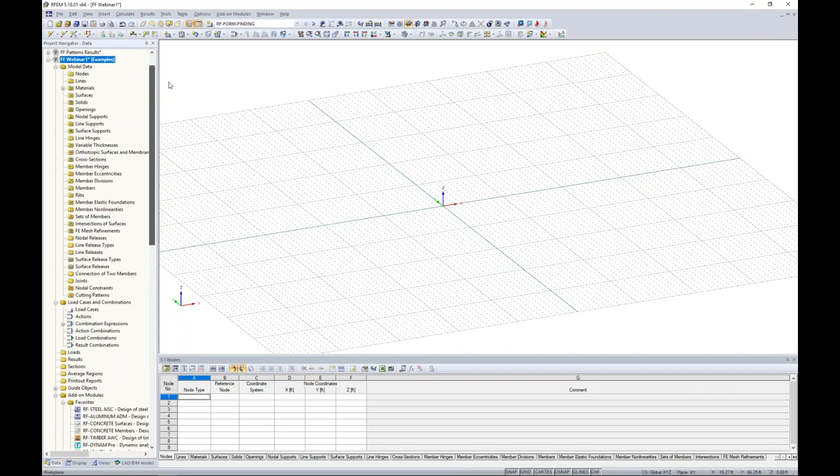But with RF-STEEL AISC, which we'll touch on later, that's an add-on module you can launch from here. Our results will also be available within the project navigator. The fourth tab down here may be new to some of us - by enabling that CAD BIM model option, we now have this fourth tab to import an IFC or a step file. So I can simply click one of these buttons and I have available to me my IFC building for my office building.

So with a few steps, we can see here that the IFC file is imported into our main program, RFEM. Now, I want to be clear that these are still just components - they're not actual elements within RFEM, meaning they're not surfaces, members, or solids. We would need to convert those to elements in RFEM, so right now this is just serving architectural purposes.

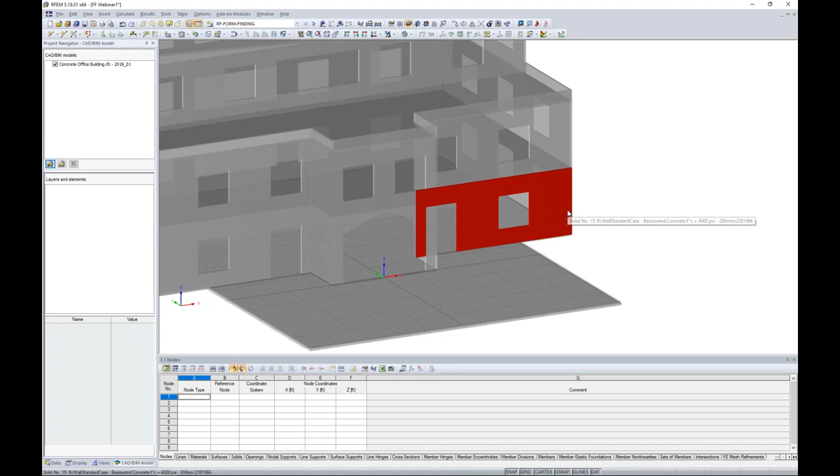In particular today, for this concrete office building, I'm trying to design a canopy on the front face of this building, but I want to make sure it lines up perfectly with the front face of this office building. That's the whole purpose of importing in this IFC file - we're not going to be designing the building today.

So what I can do is take one of these elements, and in particular, we'll start with our front slab. I can right-click to create a surface. Now the program generates some arbitrary thickness and selects some material within the model - this really doesn't matter, we're actually going to end up deleting this slab. We're purely using the nodes and lines for geometric purposes to generate our canopy structure. So I can just click OK.

Once I've done this, I can actually hide my IFC file, and all I'm left with is this shell element that I converted from that file into RFEM. So what we'll do here is turn this into wireframe view with my view options up at the top, and I'll take this line element on the left side of my slab.

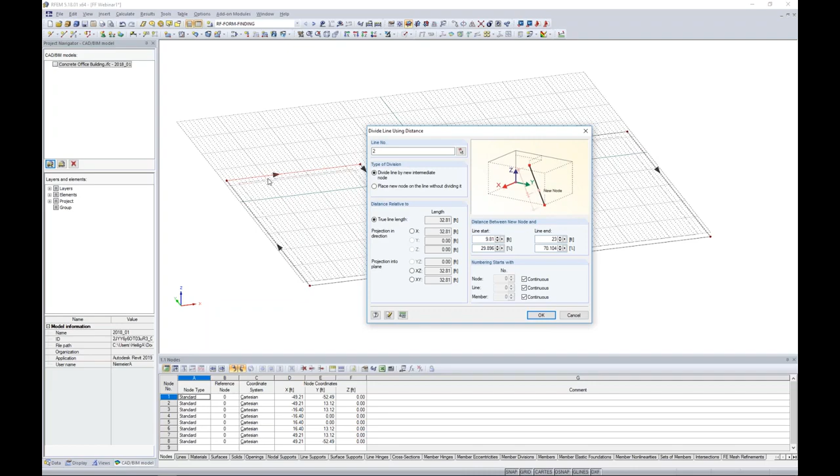I'll right click to divide the line by a certain distance. Here is where I can select 23 feet from the line end, and I can see with my black arrow here what's the line start and what's the line end. I click OK - so all I've done is generated an additional node here right along this line length.

Now I can hold down my control key to select that new node in addition to this node here. I continue to hold down my control key and take advantage of what's called drag and drop. This allows me to make quick copies within the model without using that move copy tool.

I want to additionally use this connect lines or members tool up here at the top. So I select this, and what this allows me to do is highlight over that node, and it simply broke that line apart in two. So I take these newly generated nodes, holding down my control key to select them, and now I'm going to use my move copy tool.

I'm going to create one copy in the global Y direction, which I can see my global coordinates here of negative 30 feet, and I click OK. So here are these new nodes generated at a distance of 30 feet in the global Y direction.

Now I need to add in a node right here at my origin, so there are several different ways to do that. Up here in our quick tools, we have the option to draw a new node, which I could just easily snap to the drawing grid here at the origin. We also have this feature called node between 2 points - when I select this option, I can click on the node on the left, the node on the right, and the program automatically suggests that I'd like to place a node right at the midpoint.

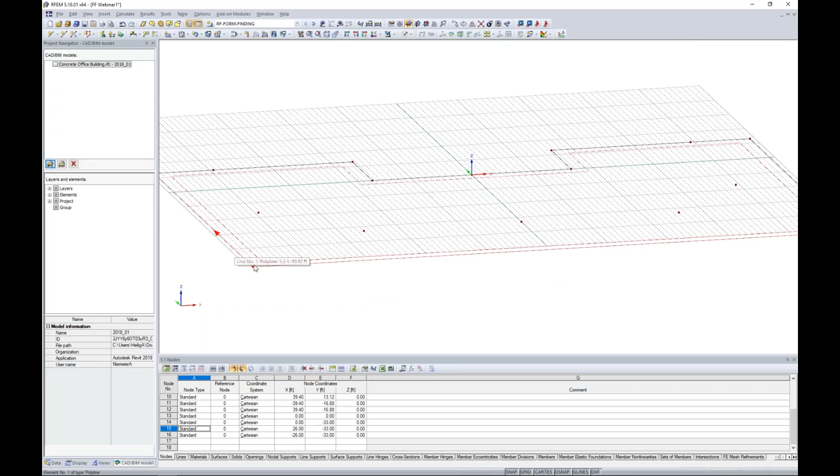Now that we're done with the basic nodes at the bottom of our canopy structure, I'm actually done with this surface, so I can select it and hit delete on my keyboard. We can clean up the model by deleting all the line elements we no longer need, just clicking on them and hitting delete, and we're left with only our nodes at the bottom here.

The next thing to do is generate our columns. These won't be columns yet, just lines, placeholders which we'll later assign a cross-section and material to. I want to select the nodes I'm first interested in, holding down my control key to select various nodes, then use my Move Copy tool.

We create one copy in the global Z direction, the vertical direction, of 23 feet. Before I hit OK, I go into the Edit Expanded Settings, which allows me to create lines between my copied nodes, saving an extra step rather than drawing those lines manually. Once I click OK, those line elements that will eventually be our columns are drawn here.

Now, in the rear of my canopy, this is where it will be framing directly into the office front face, so I don't need to draw columns back here. Instead, we're going to attach at the top of the canopy directly to the office building. So I can highlight these line elements and my bottom node and delete them all together, leaving just these nodes up top.

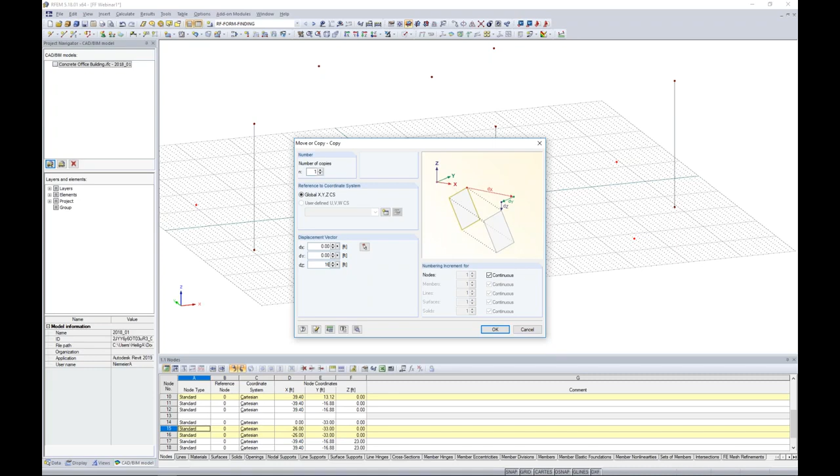Now, in a similar fashion, I want to select the individual nodes left down here at the bottom, use my Move Copy tool once again, this time only a distance of 16 feet. We leave this setting to create lines between nodes, click OK, and here are my additional columns.

Again, back here we're framing directly into the office building, so I don't need these columns, just these nodal points at the top. And just like that, we've finished with the basic geometry from that initial slab. I'll turn off my grid down here at the bottom, and I'm only left with these node points, and I'd like to draw the outer profile of my canopy structure.

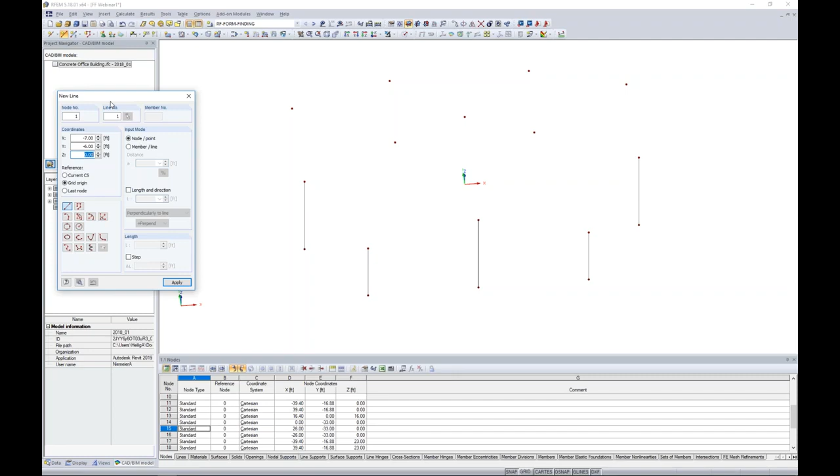I can choose a new line element here in our quick tools, keeping in mind I still have drawn no members within the program, just simple lines and nodes. This is exactly what you'd think of as AutoCAD, just line elements only, and we choose this straight line option.

Here I can snap to these different nodes I've generated, and the program is fairly good about using the O-snap settings to snap to the top of these nodes. I continue around drawing the structure, then right-click to exit, and we have the outer profile shown.

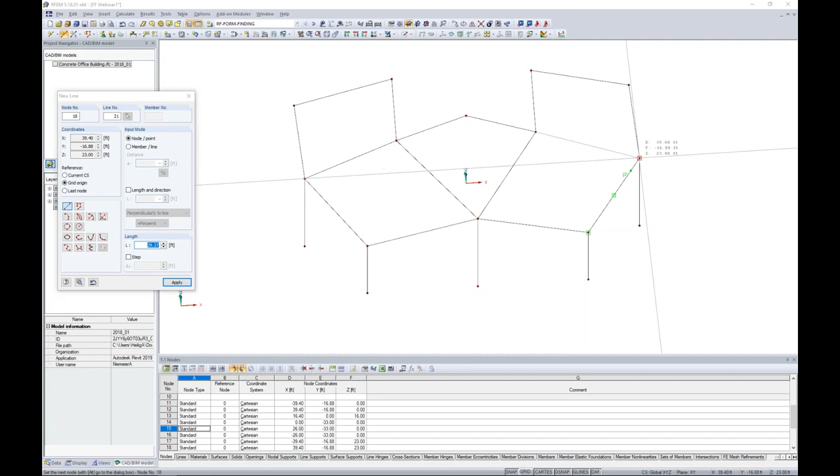Now I need to draw lines to define the individual cells of my canopy, so I continue by snapping from one node point to another, doing so on the right side of the structure. And just like that, we are finished.

If we're interested to see how these elements frame into my office building, I can always reactivate this IFC file of my office building. Remember, these are just components used for architectural purposes, so I want to make sure my canopy isn't framing over any windows or doors. So far, it looks okay, so we turn that IFC file back off.

Now we want to begin drawing our cable elements. Our cable elements are going to be placed on the boundary lines of my fabric membrane.

This is pretty common within membrane construction. These tensile cables will take the tension forces as the fabric is stressed.

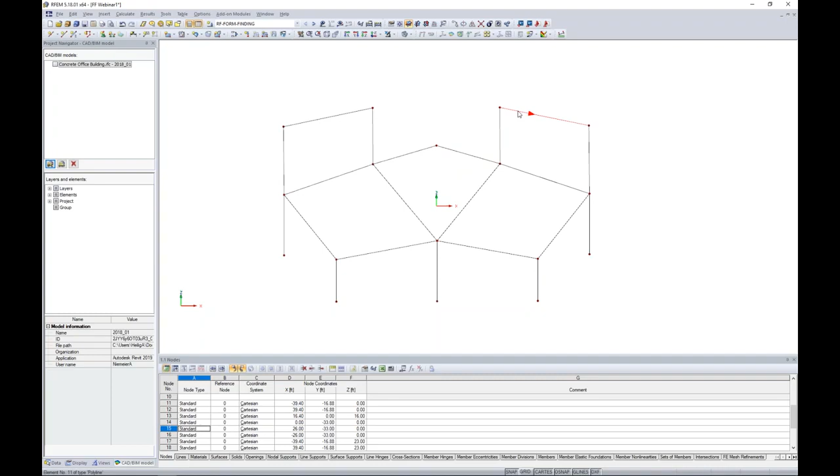At locations where we're framing directly into the office building, these line elements will be cable elements, so we can just assign cross-section properties for the cable elements to these lines directly. But for the other line elements at the front of the structure, we have a small issue.

These will eventually be HSS steel members, but I also want to show cable elements at this exact same location. The problem is that both the steel member and the cable elements cannot share the same line, so I actually need to draw a small offset line here to represent my cable as an arc member.

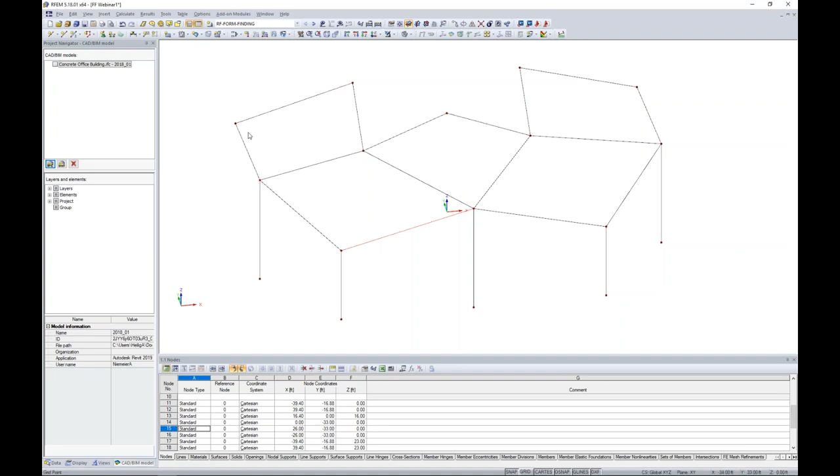How I can do this is to turn back on my grid down at the bottom, and we don't want to use these global X, Y, and Z coordinates because we have some pretty odd geometries here. We have a nice feature in the program where we can define our own work plane by clicking on 3 grid points.

So how I can do this is to click this option once. I click 3 times to define my grid, and then you'll notice that my drawing grid is automatically placed at the incline that I've specified with those 3 points. So it has a new coordinate axes of U, V, and W.

With this new coordinate system, I'm going to draw a new line again, but this time I'm going to draw an arc via 3 nodes. So I can simply click on the point closest to what will be my office building, and click on the column point, and there we have it. We just have a simple arc element.

Now keep in mind, the arc radius is completely arbitrary. It doesn't matter what we set this to. The program will later override this shape with the form-finding process based on the pre-stresses that we put in, to find the correct catenary shape for us.

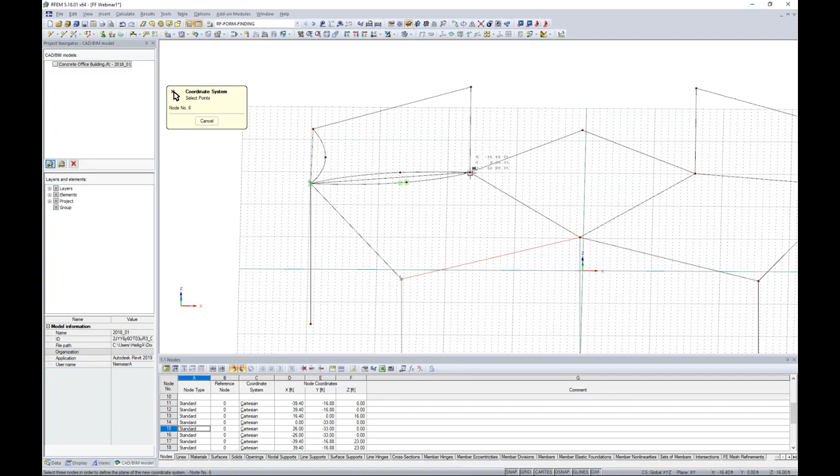I'm going to do the same thing at a different location for my cell points, again completely arbitrary. We need to move up to the second cell and change our user-defined drawing grid. So I click first to reset the drawing grid, click it again to define my new point, and click on 3 points here. Now you'll notice I have a new drawing grid at a specified angle.

So we go to draw a new line here with the given arc, and I can simply snap to these points, again any arbitrary points. We need to lastly do so over here, so we click this option in our toolbar for a user-defined grid, click our 3 new points, and now we have the specified angle given.

We go back to draw a new line element as an arc with 3 points, and continue on with this process for our additional cable elements, and one more time for our third cell.

Deactivating this grid at the bottom, I have these cable elements shown here, and I'd like to show them on the other side. Rather than going through that entire process again with our user-defined grid, we can hold down our control key to select what will be these cable element lines and take advantage of our mirroring tool.

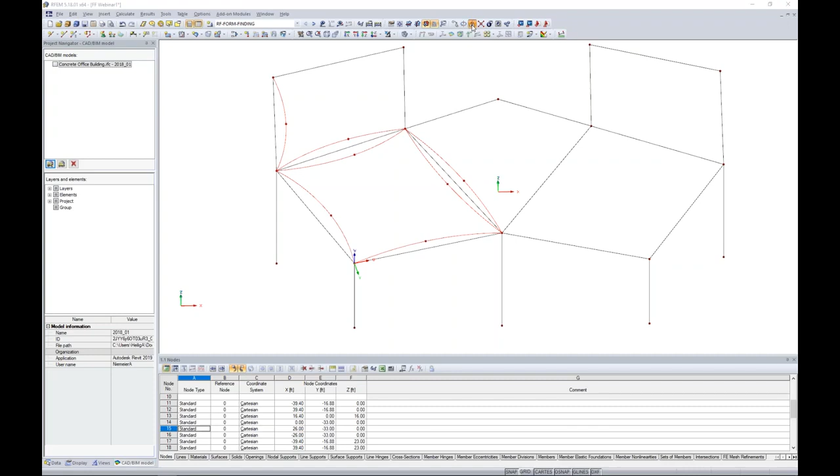Mirroring tool, exactly like what it sounds like, similar to what you'd see in AutoCAD. We can create a copy by mirroring about the global YZ plane, and I can click any point within the model to mirror about. I click OK, and here we are presented with our what will be cable elements on the other side of the structure. That just saves us an immense amount of time.

So now that we've defined the boundary lines of what will be our fabric membranes, we can move on to drawing those 2D surfaces within the program.

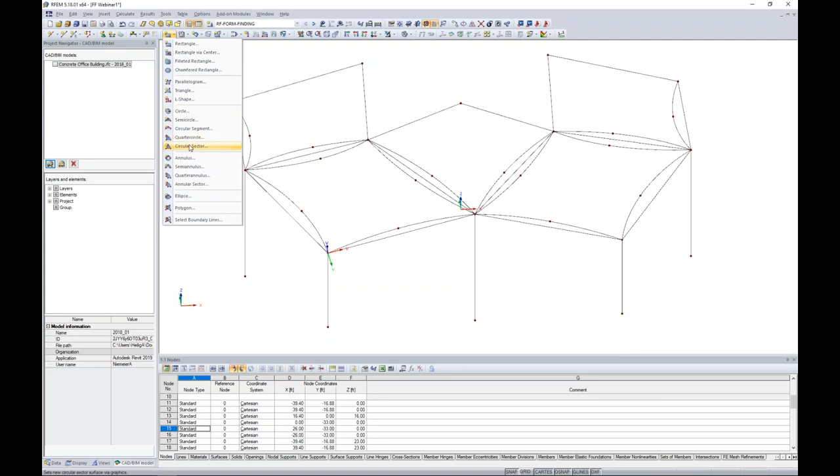For this, I would typically suggest for a flat membrane to draw a new surface element. But you'll see here that all of these surface elements within RFEM are only considered in a single plane. If we take a look at this very complex geometry, I think we can make the assumption that these surfaces are certainly not in one plane.

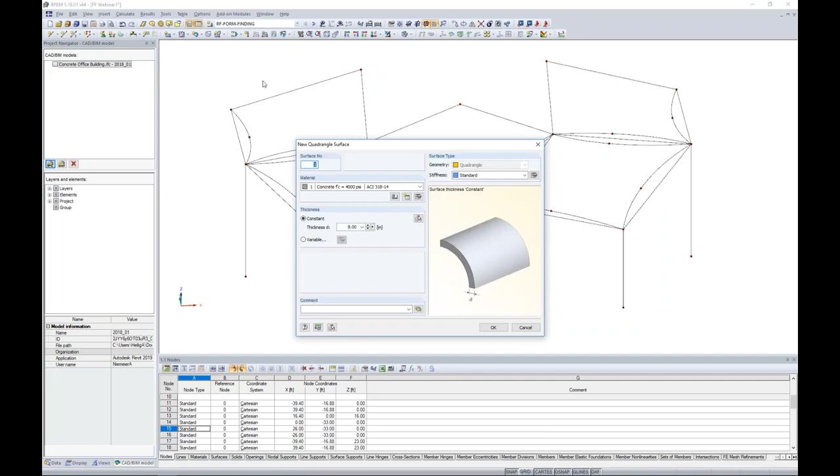So this is where we need to use the option for a quadrangle instead. We can use that from our drop-down list here, quadrangle, general 4-sided surface. The stiffness will be set to membrane orthotropic.

And the next thing we want to do is to define here what will be our membrane material. So in all cases for these membranes, you're likely going to have to create a new material. So we can do so by creating a new material, which our dialog box pops up. We can give it a name. We'll call this one membrane.

We even can change the color. So perhaps for my model here, I go into my color palette and I'd like to use a green color instead of blue for my fabric membranes. We change the material model here to orthotropic elastic 2D. Now, I want to preface this that with this information here, this is likely you're going to get from the manufacturer. Maybe you have your own testing methods or whatever relevant resources you have.

For our example today, we know from our manufacturer that our fabric membrane is stronger in one direction than it is the other. But this is actually something that I'm going to set in as an isotropic membrane for the time being. The reason why is because I don't know with these complex shapes of my membranes, complex geometry of the canopy, which way I should span that strong axis of my membrane to take the high tension forces. So I'll show you later on how we can easily determine that.

So for right now, we want to set this to an isotropic material, which means it has the same stiffness or the modulus of elasticity in both the X and Y direction. But keep in mind, we'll come back in later on to adjust this. Now, as far as the shear modulus in the first two directions, we have relatively no shear strength, but in the plane of the membrane, in the XY direction, we want to set this to 7.25 KSI. Poisson's ratio, we can set this as 0.3, and I click OK.

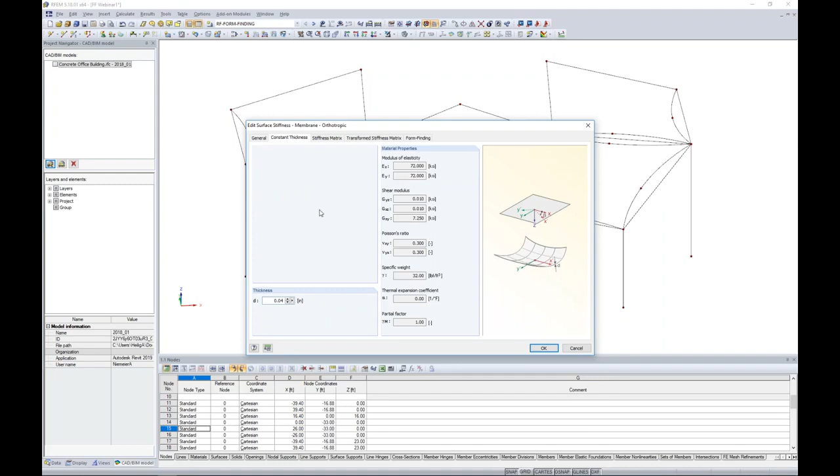What's quite powerful is that we can view the stiffness matrix of our membrane. So if you're interested based on the material properties that we put in here, this is exactly the stiffness matrix that will be reflected in the RFEM model. And finally, our form finding tab. This is available because we have activated the form finding module at the beginning of the presentation.

We have two different calculation methods for this, either standard or projection. So standard is pretty typical for fairly flat membranes, and we'll be using that for today. Projection would be used for more conical type structures. So with the standard calculation method, we can specify a pre-stress force in both the warp and weft directions. This is in the X and Y directions, and we'll choose 0.5 kips per feet. And I click OK. So now we're done defining all of the various settings for our membrane.

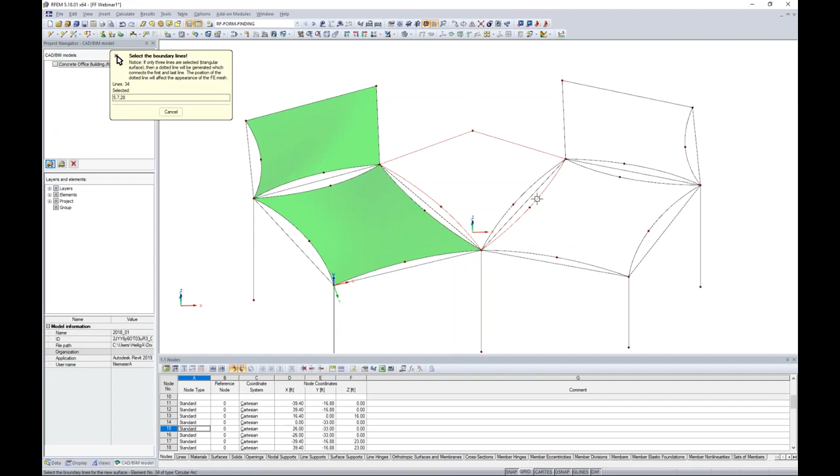We click OK. The program's asking me to go ahead and define the boundary elements of my fabric membrane. So you can see that as I begin to click what will eventually be these cable members, that our fabric membrane is created. And lastly, our last cell over on the right, we right-click to exit out of that dialog box. Again, if we're curious to see how this frames into our concrete building, we can activate that IFC file, and we can see that everything looks to be great so far.

So deactivating that, we want to move on to the cable elements. So again, right now, all of these cable elements are just lines. They don't have a cross-section or material defined. So what we can do is to hold down our control key, select all of our membranes, and I'm going to choose a visibility by selected objects. When I do this, I can highlight all elements within my model.

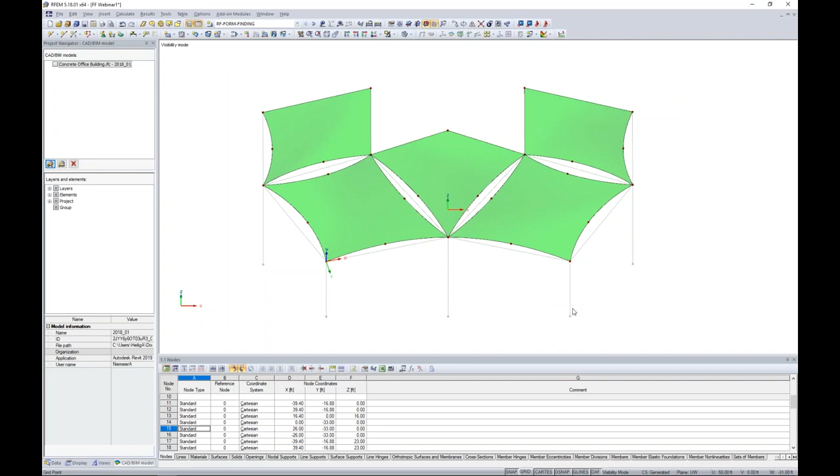Now you'll notice that down here, my column lines and the other various lines are not available to select. That's because I've deactivated them in my view. I only can select my membranes and their boundary lines. So I can right-click to edit the lines. And we're brought into our line dialog box. And the third tab here is called Member. This is where we can make a member available by selecting this checkbox. And here is where we can set the member type to cable.

The program's telling me I need to create a new cross-section, so I'll access my cross-section database, which you can see here we have all of our various cross-sections available within RFEM. We have several parametric sections, massive sections, thin-walled sections. We have all the rolled sections from the various standards, and in particular today, I'm going to use this solid

sections. So this just has some pre-populated diameters. They're basically just round bars populated from the AISC with set diameters, but you can always create your own with a parametric section. We'll choose a 1/2 inch diameter cable. The material is also set within this same dialog box.

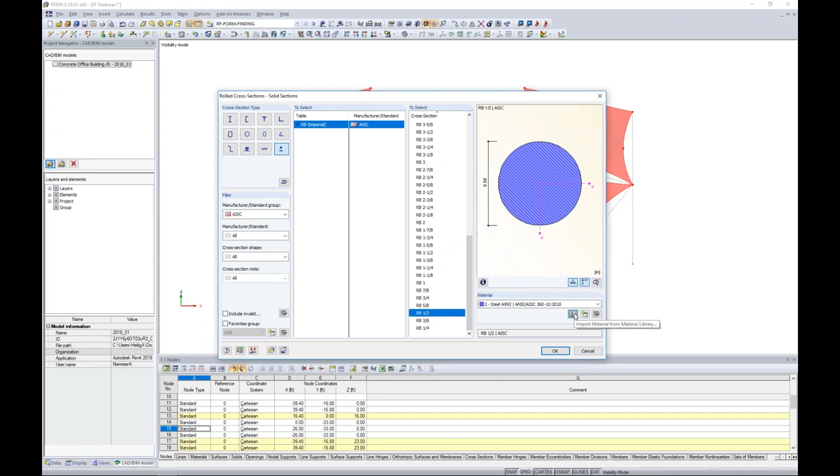So with the cable materials, I'm going to access my material library. Similar to the cross sections, I want to use my filters over here on the left, and I choose metal, but under my second drop down, we can choose cable. Now, typically when you first populate this, you'll only see a few materials available here from the manufacturer Pfeifer. If by chance you're using this manufacturer, then great.

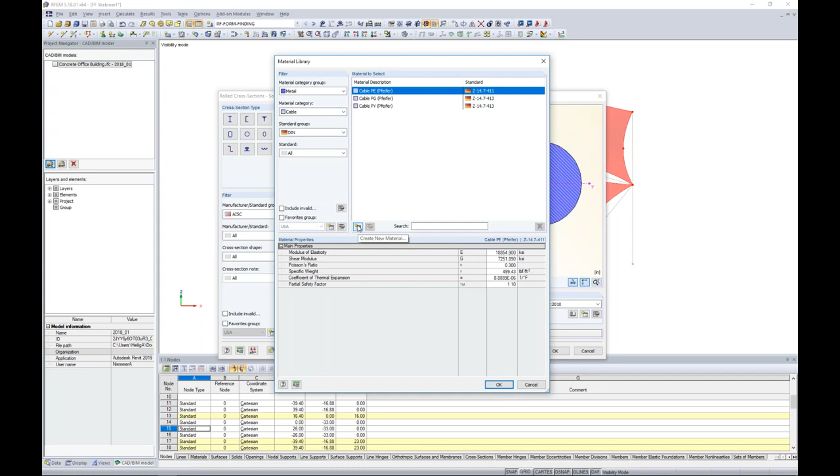Your materials are already set within our database, but likely you're probably going to have to add your own from whatever manufacturer you're using of those particular cable elements. So we can do so adding our own material with this button down here, Create New Material. So what I went ahead and did is I created a new material, which if I back out of this, we'll be able to see it. And I called this one my ASTM cable material.

Then we can put in the material properties, and you can set the applicable filters over on the left that you would like them to be available. Once you have input these material properties and you've saved this material description, it will always be available for any future RFEM model. So you don't have to define it every time you create a new model. So once we've done this, we'll go ahead and use this ASTM cable material with my material properties shown here.

I click OK. And before we click OK out of this dialog box, similar to the membrane elements, we need to set our form finding settings. So I go ahead and click on this expanded settings dialog box, and this is where we can activate either a target cable length, a cable sag, or maybe we just apply a pre-stress force directly. So this is only available with RF-FORM-FINDING activated.

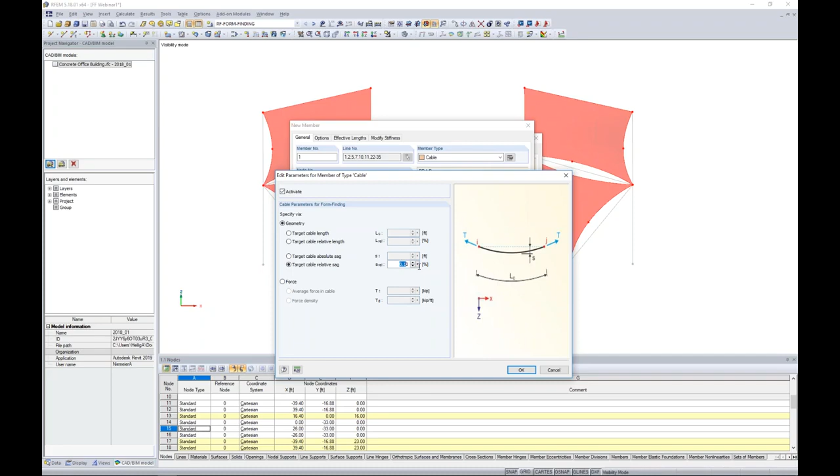Essentially what this allows us to do is to model these cable elements as either straight lines, which you can see back in my RFEM model, or pretty much any arc shape like this. And everything will be overwritten based on these settings here. So for today, I want to use a target cable sag of 10%. I click OK. I click OK through all of these dialog boxes.

And now, I know it's a little bit difficult to see, but we do have cable elements set for the boundaries of our fabric membranes. So I cancel out of this visibility mode, and we need to continue with this same manner for the additional line elements that are left here. So we'll start off with our columns.

So I'm just going to use my selection box here to highlight over the vertical lines only. I can double click, and again, we have a member tab where we can make this member available. Now, of course, we want to change this member type to beam. We certainly don't want cable elements for our columns. We want to choose a new cross-section from our cross-section library.

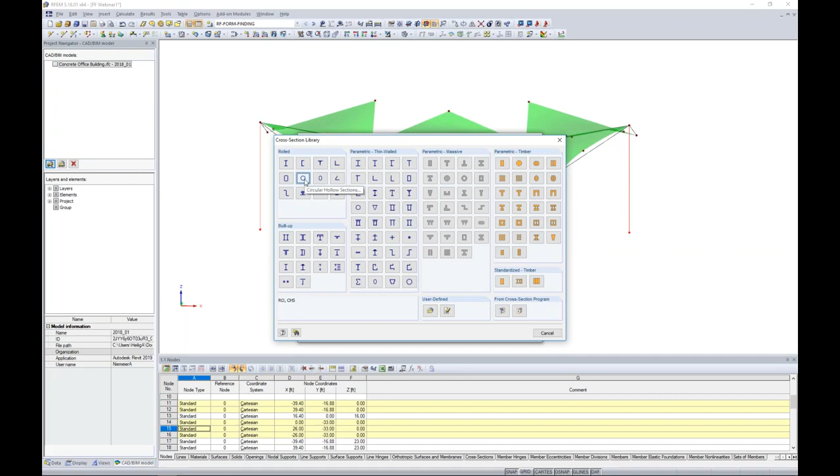And here is where we can access our HSS sections directly from the AISC. So within this drop-down box, you'll also see the various other standards and manufacturers available. In particular, the CSA standard will be available here as well. So we choose the AISC 15, which is the latest version.

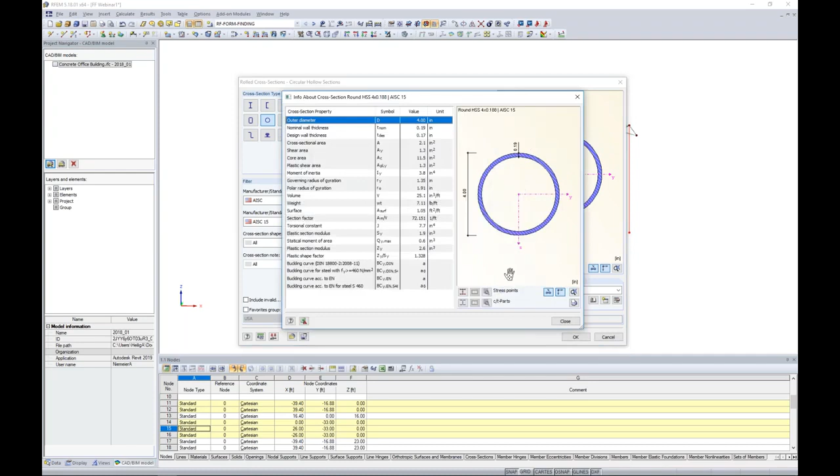Now for my canopy structure, I'm really not trying to detract too much from the aesthetic appeal of this office building. And we know that this canopy isn't going to take a high amount of vertical gravity loads. So what we can do is to choose a pretty low profile section here. We'll choose an HSS 4-inch diameter here, which we can see the cross-section properties available to us with this info button.

The material is also set within the same dialog box, similar to what we just saw with our cable elements. So we can access our material library, and we use our filters over on the left here to select steel from the ASTM, and here we have available the 2016 version with all of the AISC materials available to us here. Again, if you want to create your own material, you can do so with that same button down at the bottom.

For today, we want to choose A500 grade B, and our given material properties are shown here, and I click OK. So once I'm done with these dialog boxes, you can now see these columns have been generated with the applicable material and cross-section shown here in the rendered view. So we need to continue doing so for our remaining line elements here.

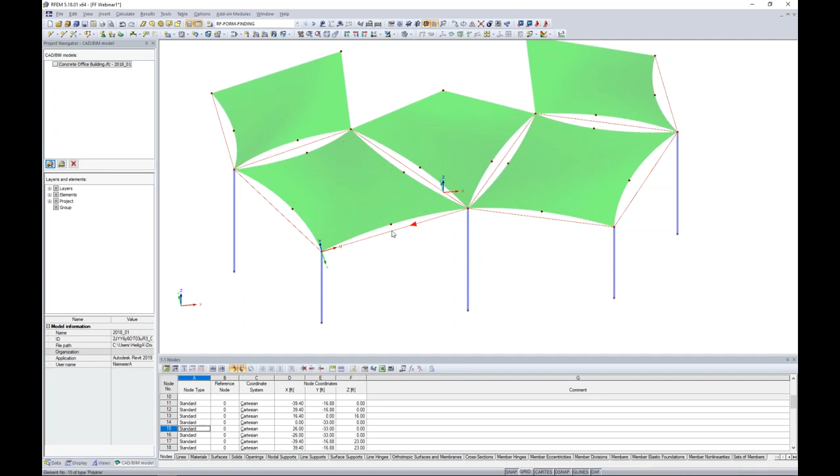These will actually be our compression members, which we also want to set as HSS. And we'll double click on these lines. Again, we're just choosing the member type available here. The member type this time will be set to truss. The only difference between a truss and a beam member is that the program's automatically going to release that moment at the member end. So it's just a quick way to set in the program that we want to transfer only shear and axial forces. You'll notice that my member hinge option is grayed out down here.

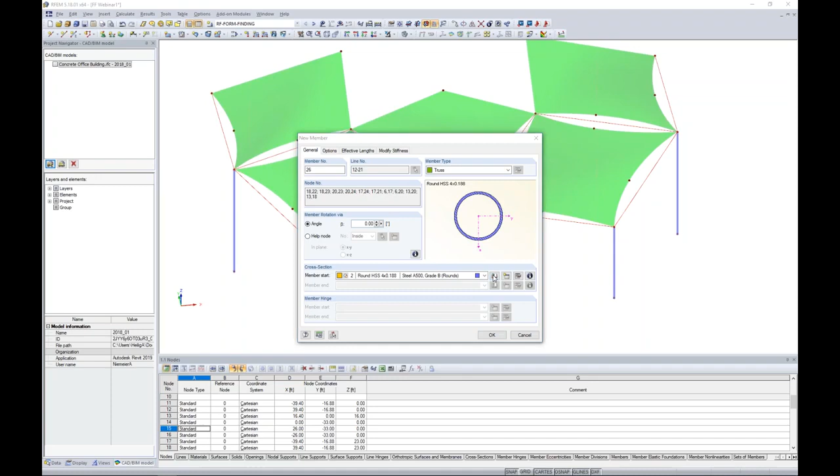We go to our cross-section library once again. We choose our HSS sections, and because these are taking quite a bit higher loads, especially in compression, we need to choose a bigger diameter. And in particular, we'll choose 7.5-inch diameter. I've already defined that steel A500 grade B material, so I don't need to define it again unless I want a different material category, but it's available to me here within my drop-down box. So I click OK. I click OK once again, and now you can see those HSS members available for our structure.

So before we can run the form finding procedure, we obviously need to support this structure. So what we can do is to select a new nodal support up here in our toolbar. I choose a new nodal support, and we have a few default options shown. I will use the first default option, but to explain what's going on with these nodal supports, we have our 3 degrees in translation and our 3 degrees in rotation. So for the bottom of my columns, I'm going to restrain translation. I also want to restrain rotation about the global Z direction. This is purely torsion for that column, so it's not free to rotate about its own axis.

We also have the partial fixity here for spring supports, and the nonlinearities are important, especially for today's presentation, because we have an option here called the form finding stage only. If by chance you want to apply a nodal or line support during the form finding process when we're applying these pre-stress forces to both our membrane and cable elements, and you only want that support to be applied during that particular stage only, we can select this form finding stage only. You'll notice the nodal support changes to blue to indicate there is a nonlinearity. So what will happen here is it will only be applied for RF form finding to find the initial pre-stress shape. Then for all other subsequent static loading, such as live load, dead load, snow load, and so on, the support will not be considered at all.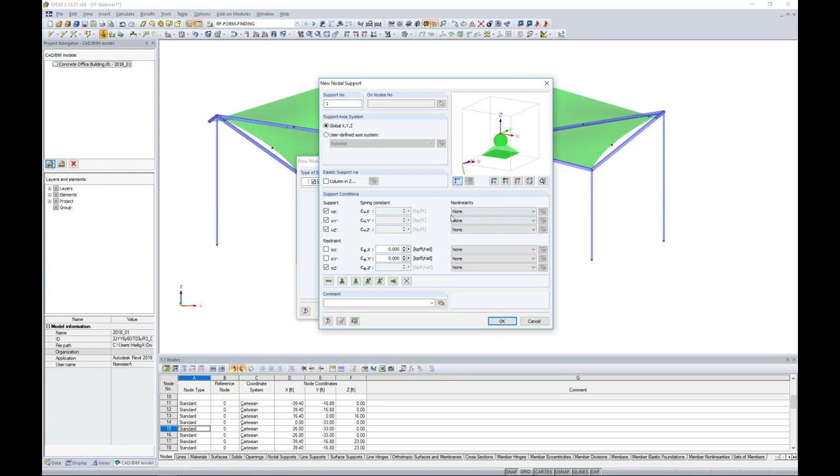So extremely helpful for when we're trying to find stability during that form finding process, but you do in fact want to make sure that this would truly be available out in the field when you are pre-stressing these membranes. You don't want to use them in the model if you're truly not using them out in the field. So for today, we're just going to use that first hinged option for our support with no nonlinearities applied, and we apply them to the bottom of our columns.

Now, for the locations framing into the office building directly, we also want a pin support, which I can access with my nodal support once again. I'm going to create my own definition here because I want to release the moment in the Z direction as well. So I only have a typical pin with translation restraint in the X, Y, and Z. I've now defined that particular support type, so I can click directly on my nodes where they will be framing into the office building. And just like that, we are done with our geometry. So back under the data tab, as I mentioned, all of our input data has been applied here, so we can easily make changes to all of these cross sections as well as materials.

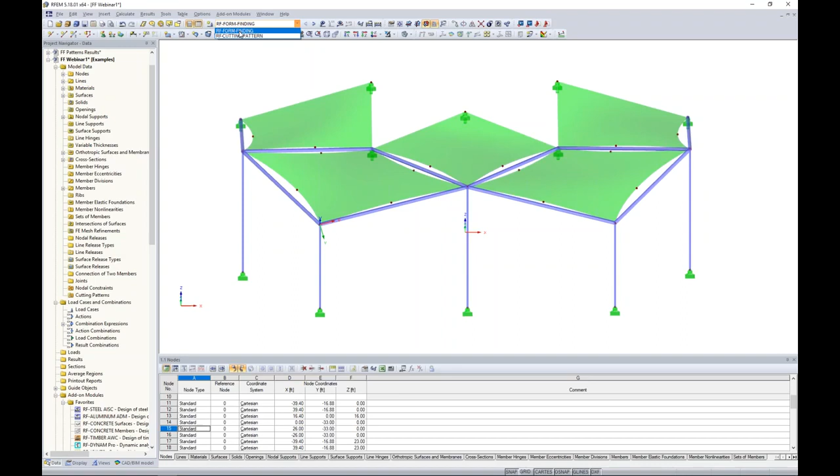The next thing to do is to run the form finding process. So I've applied no loads to my structure yet. I've only applied those pre-stress forces. In my drop-down box here, we see RF form finding available to us, and we can easily run a quick analysis for this. So all I'm doing is applying those pre-stress forces to both the membrane elements and the cable elements to find the true deflected shape here after those pre-stress forces have been applied.

So what I'm presented with are my results within my project navigator. So we can see that tab available to us here. What's probably most interesting is the initial deflected shape. I think that this is very telling for us to know if we've defined everything correctly.

If you're seeing a deflected shape that makes absolutely no sense to you at all, then you probably have modeled something incorrectly. Perhaps we're missing those cable boundary elements to take those high tensile loads. Maybe you're running the wrong calculation method with the form finding procedure. So you definitely want to take a look at the deflected shape here. So what the program has done is it has created a new deformed mesh based on my settings here that we can now move forward with.

But before I do so with the additional loading, I want to point out some very powerful features in our results that are given to us after running RF-FORM-FINDING. So the first would be to take a look, of course, at our global deformations, but we can also look at our surfaces, and in particular, the NX and NY forces. So these are the tensile forces that have been applied to our structure.

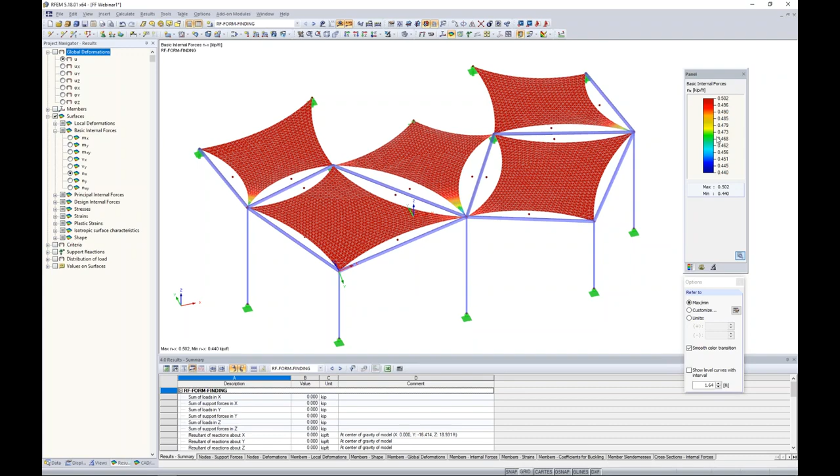And remember, I set this at 0.5 kips per foot, and that's reflected here almost identically within my basic internal forces, NX and NY. So that's a really good sign that the pre-stress forces are available to me with these axial forces for my membranes.

The other interesting thing that we have within our results is under this shape tree. We can view the different contour lines. So the contour lines are going to show us from the origin point of 0 exactly what elevation we're sitting at here in terms of inches. So obviously the points that are sitting up at these higher columns are going to have a higher contour line than at the membranes that are sitting at these lower columns.

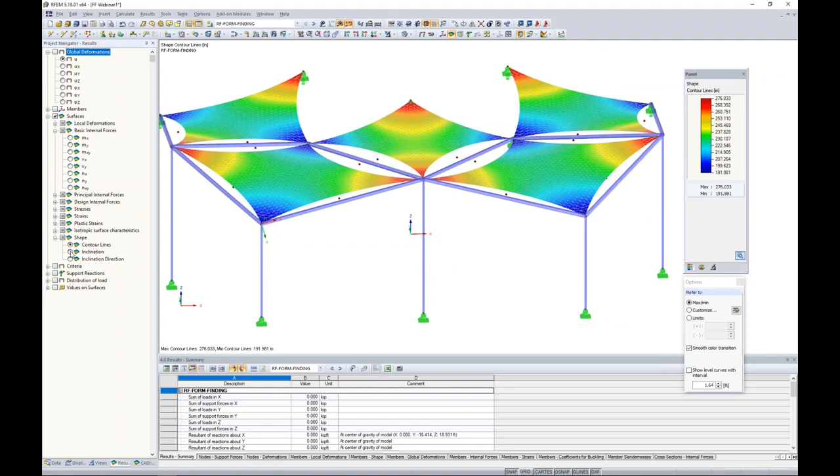We can also view the inclination. So this makes perfect sense that if we look at this location here with red, we have a pretty steep incline where this fabric membrane is framing into that support. But at these locations at the center of the membrane, we have almost no inclination of 0. That's where the fabric remains fairly flat. We can also view the inclination direction here just to give us a sense of exactly how this fabric is pre-stressed during that form finding procedure.

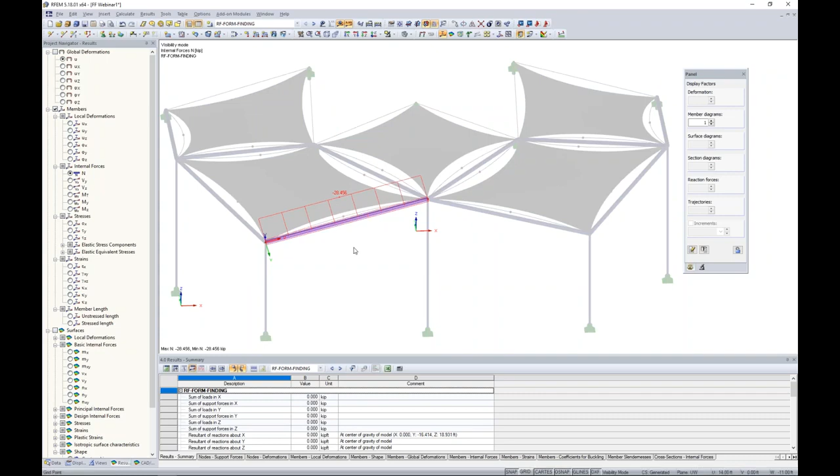So in addition to my surfaces, I also have the internal forces available to me for my members. So perhaps I'm interested in viewing the axial forces within some of these HSS members. So I can take any one of these members and maybe I create a user-defined visibility here. I'm only looking at the single HSS member and I can view those compression forces based on the pre-stresses that were applied to the membranes.

Now I can always right-click to view the results diagram. What's nice about this is I can view in a little bit more detail exactly what's going on along the member length here. In a similar sense, if I cancel out this visibility and I'd like to take a look at only my cable elements, well, under the Views tab within our Project Navigator, we actually can select our members by type and choose the cable elements only. So now I'm only viewing the results for my cable elements. I go back to my Results tab and I can view the axial tension forces within these cables.

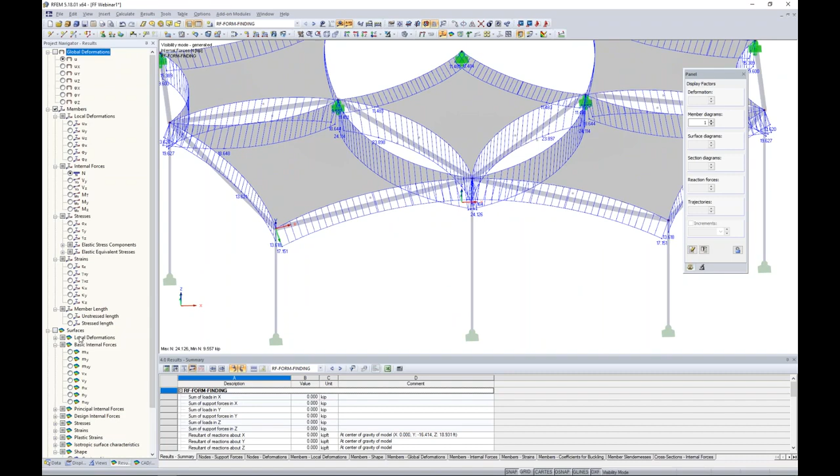In addition, we have a couple options available here under member length. We can view the stressed length of these cables as a member diagram in terms of feet. So this is the length after we've applied that pre-stress force. We also give to you the unstressed length. I think that this is really important because this is information we want to give to our manufacturer to ensure that they manufacture these cables at the correct length, which would probably be this unstressed length, so that by the time we get out in the field and we apply these pre-stresses, then we should achieve this stressed length here. So both are given to us.

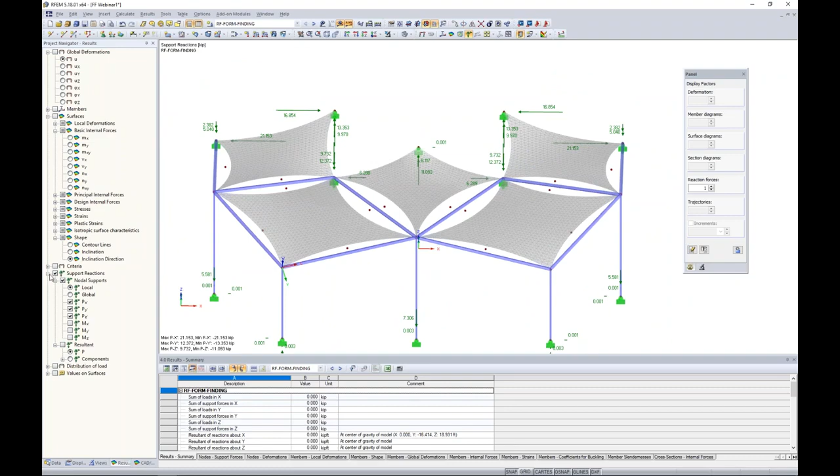Now, additionally, if I take a look at the full model view here, we also can view the support reactions. This might be important here for designing the connections that are framing into our office building. All of that information is available for the form finding process only so far. So of course, much else to cover, but we'll go ahead and move on with our structure. So I have only applied those pre-stress forces. I've applied no additional loads to my structure, such as live load, snow load, and so on. So we want to go ahead and do that now.

I'm going to create a new load case up here in my toolbar. And up pops my edit load cases and combinations. So my first load case description will be self-weight. What I'm going to do here is I'm not going to put self-weight under dead, but I'm actually going to put it under form finding.

So what exactly am I doing here? Well, that form finding process I just showed you did not include self-weight, so keep that in mind. In reality, when we go out to the field and pre-stress these elements, it's inevitable that self-weight will be included. So you'll want to create a load case under the form finding category with self-weight active in the negative Z direction to account for that during the form finding process.

We didn't do that, but now we can account for it with this load case. Any other loads available, again for pneumatic structures, we'd want to put under this form finding case. It's important to understand that for any additional load cases, the program's telling me I have to clear my results since the previous ones are no longer valid. We don't want to add any additional self-weight to any of my other load cases, since we've already accounted for that in the initial self-weight load case during form finding.

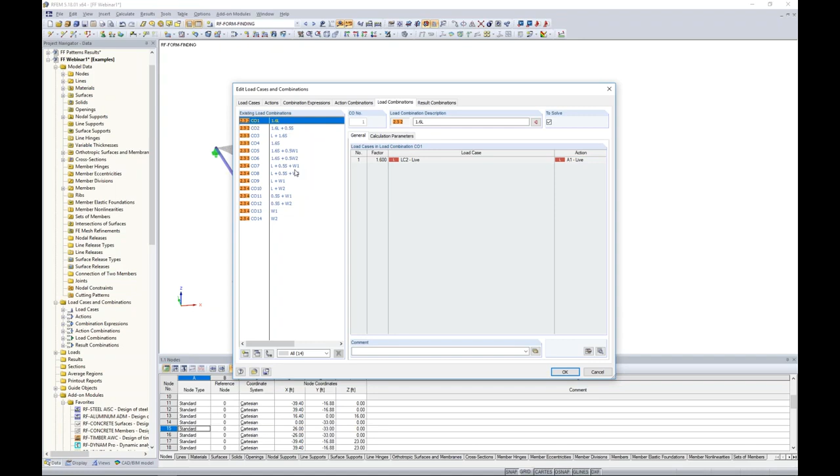My load combinations tab will simply list out all of my LRFD load combinations based on the standard. My result combination is simply an envelope solution where both my max and mins will eventually be presented within our results for all of the LRFD load combinations. So what I've done now is set up those load cases and combinations, which should be available to us in our drop-down box here.

But now I actually need to apply those loads to my structure. My self-weight load case—we don't need to do anything, everything's done automatically there. My live load case, well according to ASCE 7-2016, in particular Table 4.3-1, this addresses awnings and canopies for fabric construction, and what this requires is a minimum live load of 5 PSF.

So if we adhere to that, we want to apply a new surface load, which we can do in our quick tools up at the top. The load direction will be set in the global Z direction with a magnitude of negative 0.005 kips per square foot. I click OK, and then I simply highlight over all of my membrane surfaces.

In a similar fashion, we want to apply snow load. So what I'm going to do here is go back to a new surface load. You'll notice I have snow load selected in my drop-down box here, and now my load direction is going to be in the global Z projected area.

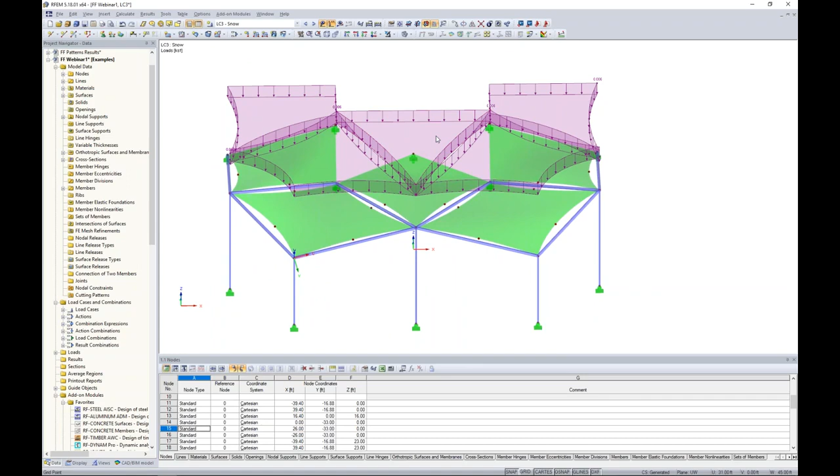So when I click OK and highlight over all of these members again, the advantage of a projected load is it will take into consideration those inclinations of my surfaces. Areas with high inclinations are where we're probably going to see the snow slide off. The program will account for those angles, but where our membranes are relatively flat, we'll see higher snow loads there. That's the advantage of a projected load.

When it comes to our wind loads, according to the ASCE 7, Table 30.11-1, this does address wind loads on attached canopies. For time's sake, we don't have time to get into this today, but I just want to briefly mention that.

For these specialty type structures, I want to mention something we are currently working on in development, a standalone program called RFlow. RFlow will eventually allow us to simulate wind flow around structures, helping us understand wind effects on specialty structures where there's really no clear approach within the various standards. It could be argued that our particular canopy today is a pretty complex geometry, framing into this office building. How exactly do these wind loads affect specialty structures like this? This will be a huge advantage once we release it.

It's not quite ready, and we do plan to integrate it with the RFEM model, so you'll be able to bring in the geometry into RFlow, apply these wind loads, and export those loads back into the RFEM model for analysis. Something exciting to look forward to, but for now we have to jump back to RFEM and manually apply these loads.

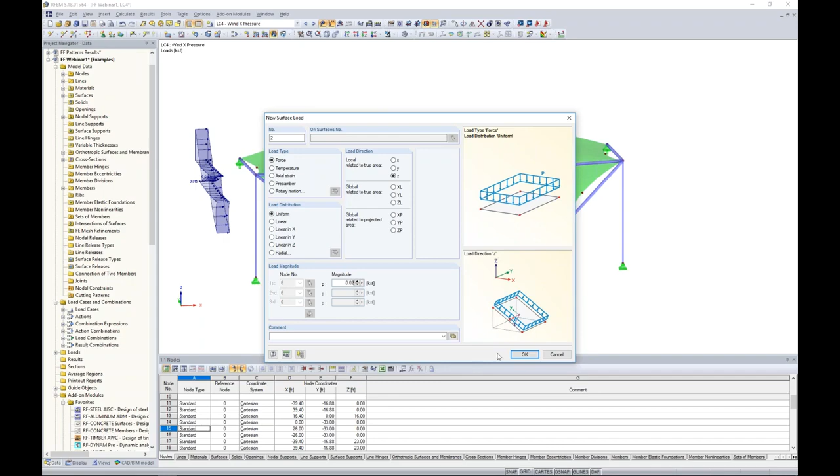Now for the downward pressure, we go to a new surface load and apply this according to the local z-axes of my membrane. I'll show you in a minute how to view those local axes, but trust me the z-axis is how we want to apply these to our structure, with a magnitude of 0.02. This is based on the local axes of the member, so now we can see those loads applied normal to the surface no matter the geometry.

For our wind in the X uplift direction, exact same scenario here - we just change the magnitude direction and put a negative for our uplift pressure, highlight over our members, and now you can see that uplift pressure normal to all of those surfaces.

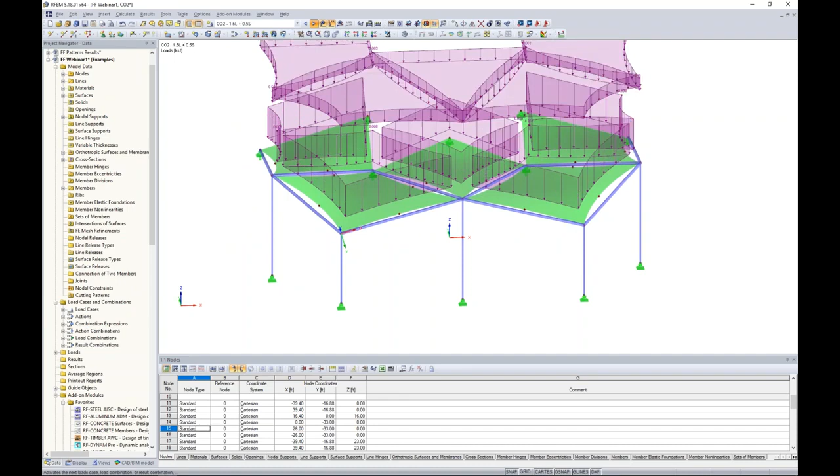We also want to apply that small lateral load in the X projected direction, this time with a slightly higher magnitude than the previous load case, highlighting over all of our members. Then we can scroll through here to take a look at all of the different loads applied to our structure based on wind, live, snow, and of course self-weight is in there too.

Before we're ready to run an analysis, remember several minutes ago I explained that we're setting this to an isotropic material. In reality, we have an orthotropic material, and I need to determine which way to orient these membranes in order to take the highest tensile forces. So how exactly do I consider that?

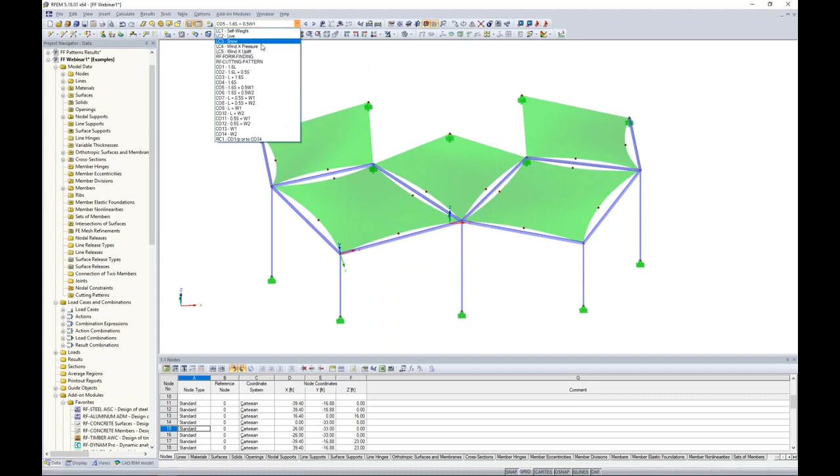What I want to do here is jump to only my live load case, and apply the live load case only to the structure. Remember, we lost our form finding results previously because I said I want to include self-weight now, so we're now including self-weight. The program needs to run back through that form finding procedure, then we're applying the downward load for live load.

Now the program is going to cycle through - you can see the iterations here for max displacement for the different iterations applied, and eventually we'll be presented with our results. So again, we're using just this single load case to determine where these high tensile forces will be acting on our structure.

So now we're presented with our results here. This is similar to what we've seen before, but now we have this live load acting down on the structure. I'm going to right-click on these surfaces to view my local axes. So there's my X, Y, and Z axes.

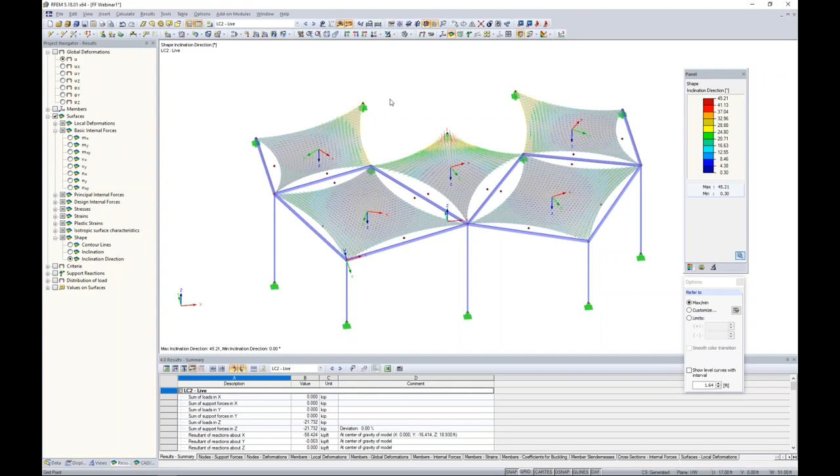Now, if I take this into an elevation view, I want to choose this option, surfaces, here for my results, which we've already been in before, and in particular Alpha M. Alpha M is going to show me my trajectories for my load distribution, in particular for N1 and N2. So this is showing me where my high tensile forces are within the member, and we can use it in addition to this colored profile panel here.

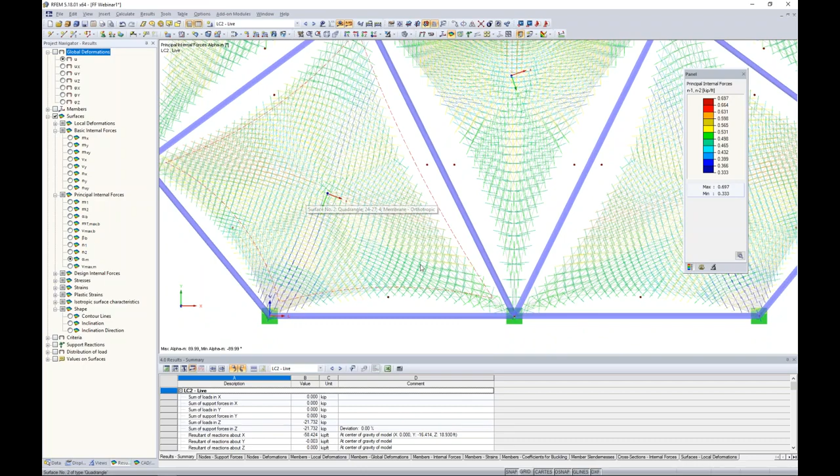If I take a look and compare, I know it's a little difficult for you guys to see, but I can see that my high tensile forces are spanning closer to the office building support down to where this column is for my first membrane. If we take a look at the second membrane, we're going to see the higher tensile forces spanning in the opposite direction, from our upper left column down to our lower right, and so on.

So how do we orient our local axes of these members to make sure they're taking the high tensile forces? How we do this is I'm going to turn back on my grid at the bottom, and I'm going to uncheck the option for my user defined grid, and we change this in the XY plane. So now we're just looking at that drawing grid at the bottom of our structure.

We probably want to take a screenshot here, or maybe we can just approximately remember which way these high tensile forces are spanning, because once we draw a new line element here, which is what I'm about to do, the program's going to suggest that I have to clear my results in order to change any type of geometry within the model. That's not a problem.

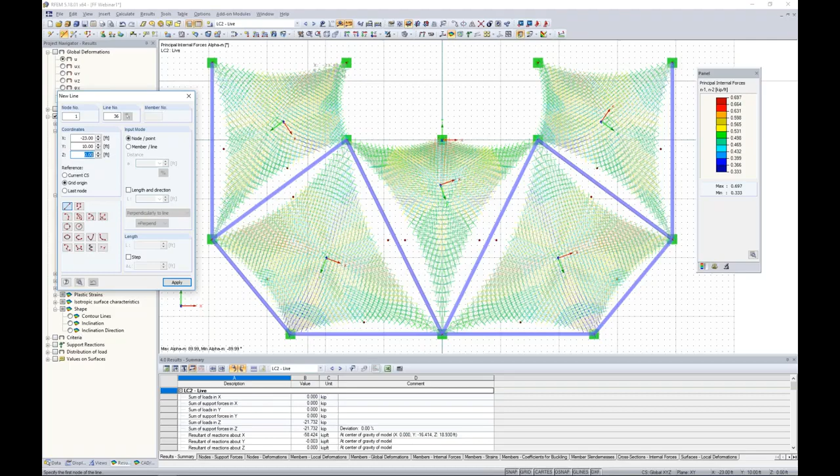I'll go ahead and create my first line element spanning in those high force areas. I clear my results, that's fine. We right click, we do the same thing here for our second membrane, and finally our third membrane here.

I'm going to take these two line elements on the left side and mirror them about my YZ plane. I click OK, and now I have those line elements shown on the other side.

So you might be thinking, what in the world are these lines going to help us with down here? If I go back to the elevation view and double click on my first surface here, I have an axes tab. This axes tab allows me to line up the local x-axis parallel to any line that I choose within the model, and I choose that line element I just generated. I click OK, and now you can see the local x-axis lines up perfectly with that line I just generated.

We haven't really affected our model otherwise with these line elements down at the bottom of the structure. I do the exact same thing for my second surface. I choose the axes tab, select my x-axis parallel to my line here, and you can actually see it's fairly close already, and it lines up to my second line. Same option for my third membrane.

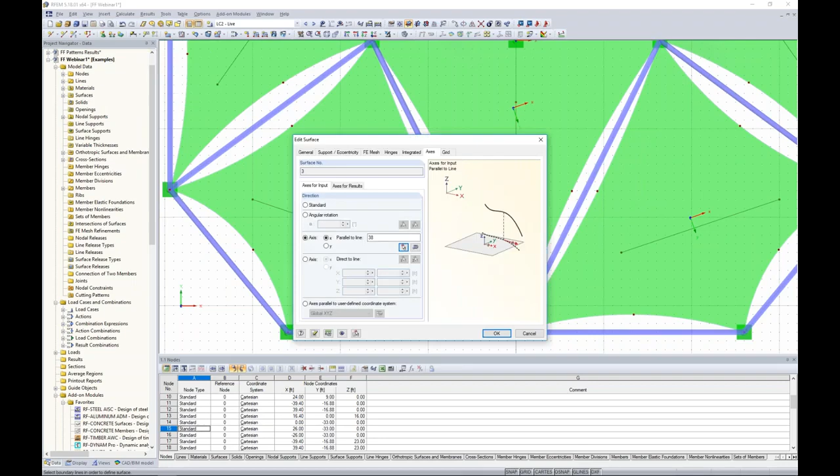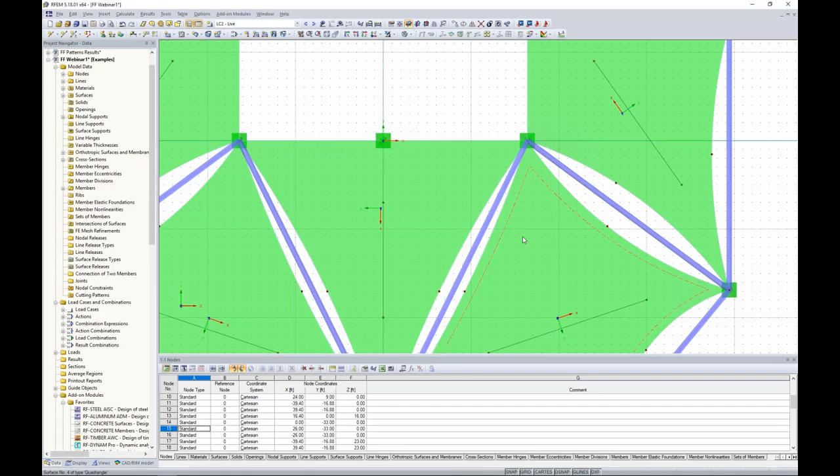I choose the local x-axis parallel to line number 38. We continue doing so around the remaining structure. What's nice is that the program automatically populates that tab I was just in, so I don't have to fumble through trying to find the same axis tab each time. Lastly, we choose our last fabric membrane, line the local x-axis to line number 39. I click OK, and you can see that now the local axes are all lined up to take those high tensile loads.

The final thing we need to do before running our analysis is remember my materials, which I can access from my project navigator. I can either select it graphically, but an easy way is to highlight it here in my project navigator, and the membranes that utilize that material get highlighted concurrently. I double click on it, go back into my material model settings, and this is where I change the stiffness in the weaker direction of my membrane, EY, to 44 KSI, and click OK. So this is just an easy way to determine exactly which way your fabric membrane should span in order to take those higher forces.

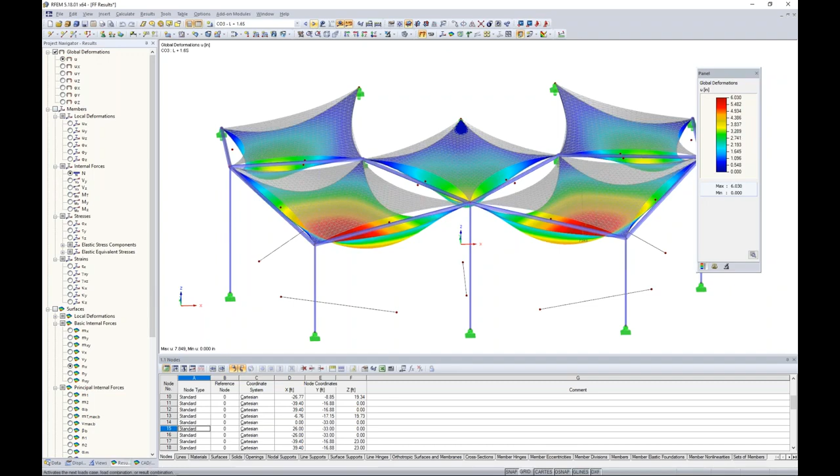So once we have done that, we're now ready to run our analysis for all these load cases and combinations. Now it does take just a minute, so for the sake of time, I went ahead and have run all those load cases and combinations, and we should have our results available to us here within the project navigator. And I can scroll through the different load cases and combinations, and in particular, I'm looking at the deflection.

What might be interesting are these uplift load cases where we have that wind pressure applied. So of course, all of those same results that I just showed you are available here within the project navigator, which we don't need to necessarily go through all of those again.

What I do want to briefly touch on is design of the supporting structure. Or actually, let me back up one more time. I want to also explain, though, that when we are designing these fabric membranes, we want to take a look lightly at NX and NY.

Now, probably from the manufacturer, we're given some strength for this material. We want to make sure that we're designing with a specific safety factor in mind. Now, this is usually around 5 or so of the material strength, so you can compare that to these basic internal forces. Now, this all depends on which project you're designing for, maybe which state, which standard, and so on. So that's really up to you as the engineer to determine, but that's likely the information you're interested in for the fabric membranes.

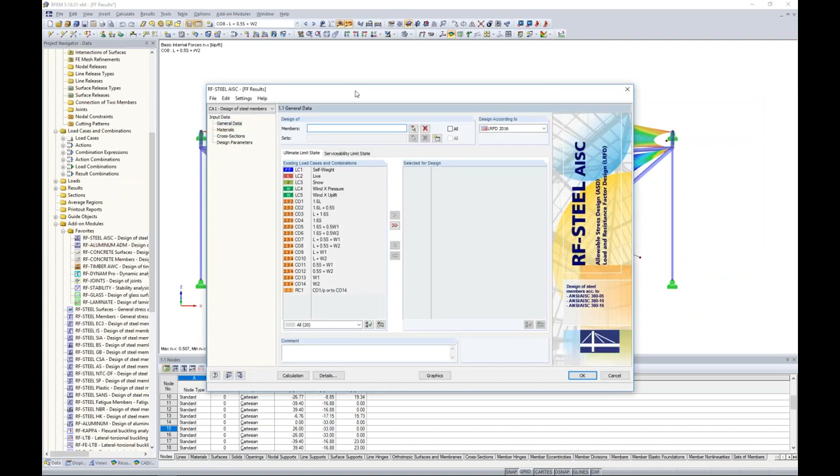Now, as far as our steel members, this is where I want to launch our add-on module RF-STEEL AISC. Now, we also have RF-STEEL CSA for Canadian steel design. And this module is a little bit different than, of course, what we saw with form finding, which was embedded directly within RFEM.

This brings up a dialog box here, and all of my information is brought into this add-on module. I'm just defining a little bit more information that's specific to the AISC standard for the design. Now, I want to explain that I'm really going to breeze through this quickly. I've done previous webinars devoted entirely to steel design that I'd like to refer you to on our YouTube channel if you are interested for more information on this. The whole purpose is just to explain that you can do the entire structure design all within one program.

So for this, we want to select our members to design. An easy way to do this is to jump to my Views tab within my Project Navigator, and I can select my members by material. And I'll choose my Steel A500, which includes all my HSS members, and I can graphically select them here.

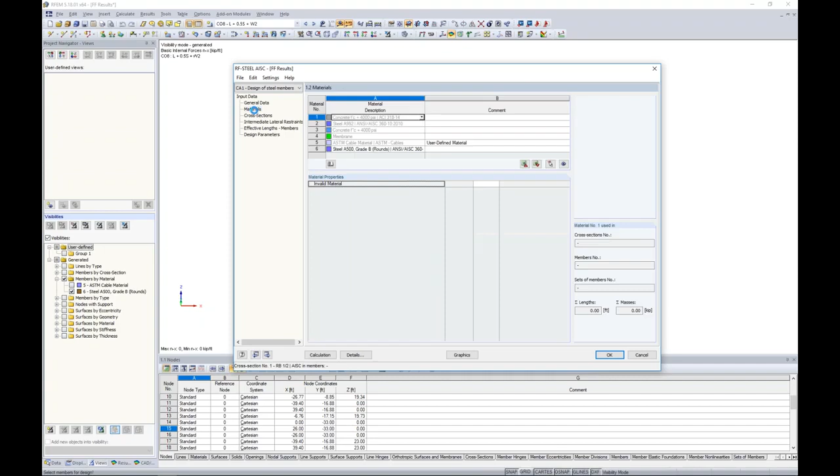I can choose my LRFD load combinations to design per the ultimate limit state, and I'm designing per the AISC 2016 LRFD. Now you can see that the materials are populated here. Steel A500s brought in, my cross sections are all brought in from my main model. The effective lengths, for example, would be my unbraced length for buckling about the strong and weak axis, flexural torsional buckling, lateral torsional buckling, and so on.

So what we can do is run a calculation here. Now, all those internal forces for my members from all the different load combinations are quickly brought in. You can see how quick that solves. The AISC equations are applied to each member, and we can view our results in table format.

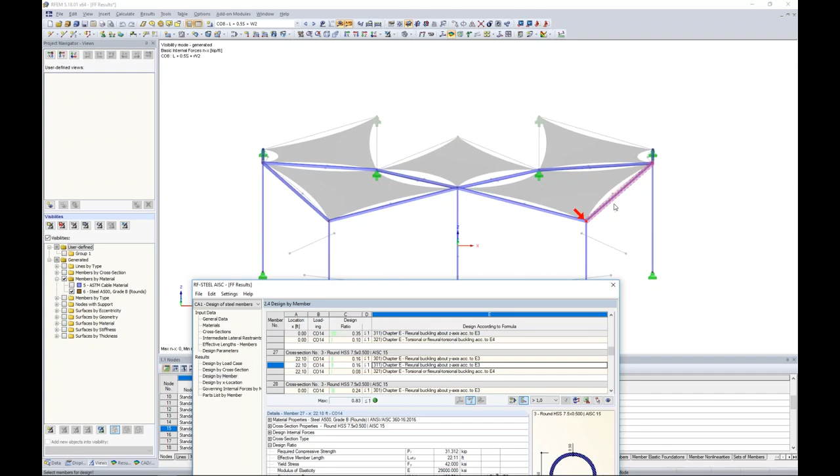So when we view the design by member, we can scroll through all of these different tables here to see how exactly the AISC has played out for these particular members. You'll notice everything is highlighted for these tables and synced up within the RFEM background. We're getting a design here for our HSS members of 0.83, which I would say is pretty great for design purposes.

We can view this information graphically back in RFEM, so we're technically still within this Steel AISC module, but we're viewing our results graphically here back in RFEM. So again, I know a really quick explanation, but again, refer to those previous webinars that I have created.

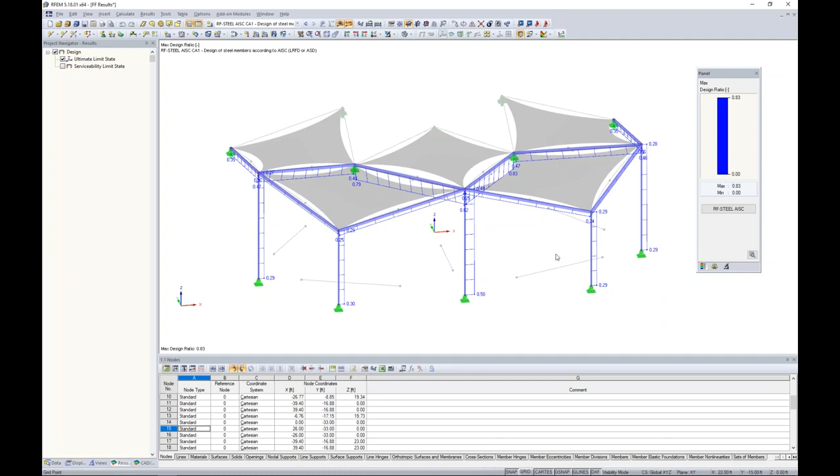Okay, so the next thing that we want to do is to quickly generate our cutting patterns. And for this, what I'm going to do is to go back here to my PowerPoint to explain a few features of the add-on module RF Cutting Pattern. So what this allows us to do is to generate small planar cutting patterns in a 2D environment where we will eventually be using them to create a double curved membrane in a 3D environment with those pre-stress forces applied.

So an easy example of this, and of course this reflects our model today, is that if our end structure, we'd like it to look like this, well, we obviously need to give some information to the manufacturer that's creating these fabric membranes in a 2D environment so that when we're out in the field, these will fit together quite nicely. So it's actually a very complex behavior to generate these 2D cutting patterns.

And RFEM in particular uses the minimum energy method. So this is a very accurate analysis. Now this is in comparison to a lot of other cutting pattern programs that are out there that are typically using some type of geometric flattening method. The minimum energy method is much more accurate and efficient for complex geometries.

What the program will do is it will press the mesh geometry of the curved surfaces into a plane using a press with frictionless press areas. This eventually results in our tension and compression stresses from this flattening process being in complete equilibrium. So that's the huge advantage here of utilizing this minimum energy method.

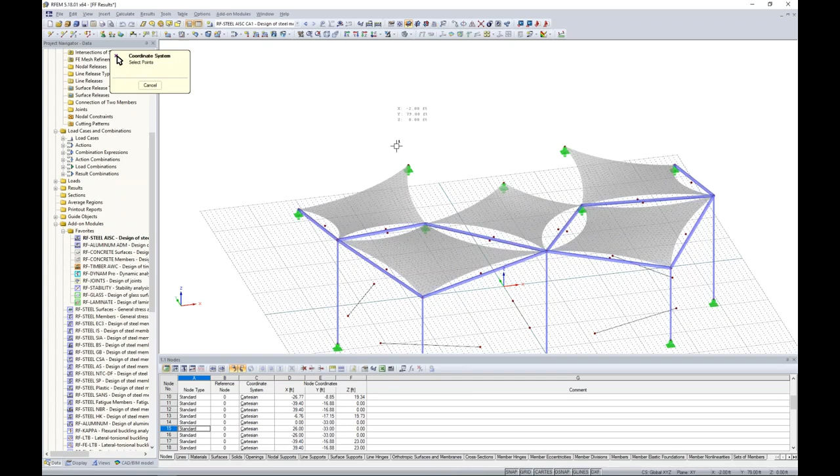So I'm going to exit out of the results view here, and I'm going to create a new user-defined grid. This is exactly what we saw before. I'm going to select this option here and click on 3 different points, and you can see that the program automatically places that grid right through the center of that membrane.

To begin generating my cutting patterns, I right-click on a line and I choose New Line, Cut via Section. Here I can select only my first surface. I click OK. Then I choose my first point of my cut, which I'll select at this point closest to our office building, and my second point will be where it frames into this lower column. The cut type will be geodesic with a definition of a direction vector here in the 001 orientation.

So when I click OK, the program automatically creates this line element here right through the membrane element with the form finding shape considered. So this is still too large of cutting patterns. I still need to continue drawing these geodesic lines further on this particular surface.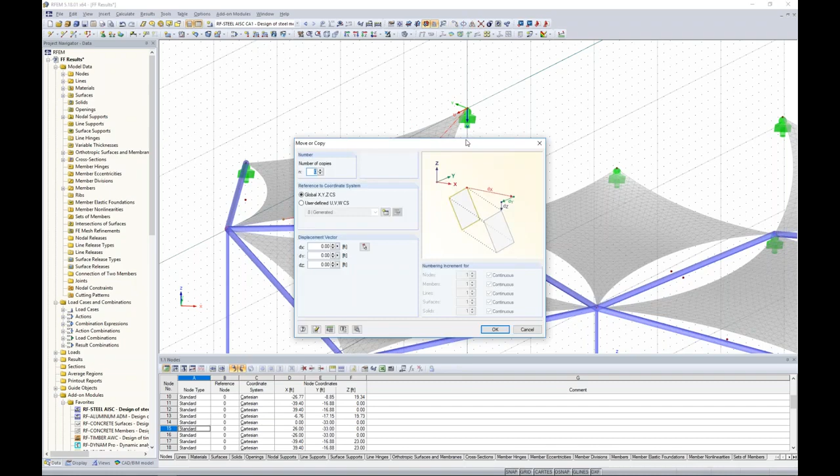So I take this line element, and I now use my Move Copy tool. Instead of using the global X, Y, and Z axes, I'm going to use that user-defined axes that I just created in the UVW direction. And we're going to create 2 copies here in the V direction of 6 feet, and I click OK. So now you can see the program has generated a couple other line elements here.

We use the Move Copy tool once again in the V direction, only 1 copy with a spacing of -6 feet, and I click OK. So what we want to continue doing is placing these geodesic lines onto each membrane here. Obviously, for the sake of time, we're already running out of time. I have done that already with an already saved model.

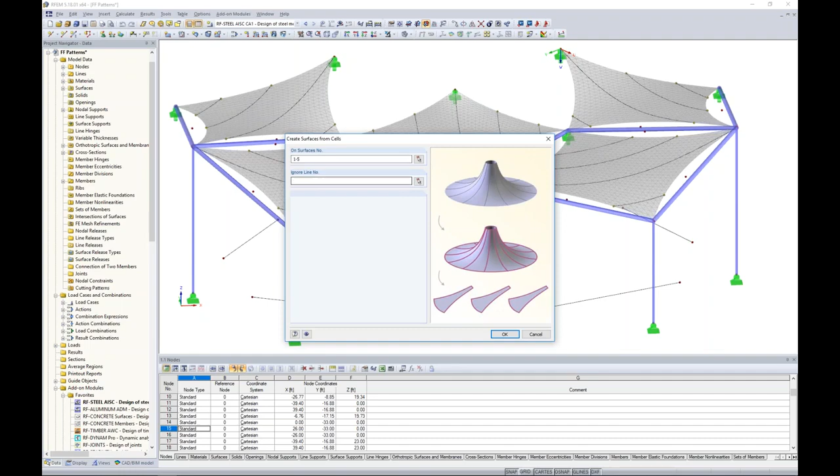So we continue placing those geodesic lines, and then once we're complete with that, we just simply go up to Tools, Generate Cutting Patterns from Cells. It's as easy as that. Now, the program asks us which surfaces. We're going to select surfaces 1 through 5 here, which is automatically populated, and the program automatically detects these different cells to generate these cutting patterns.

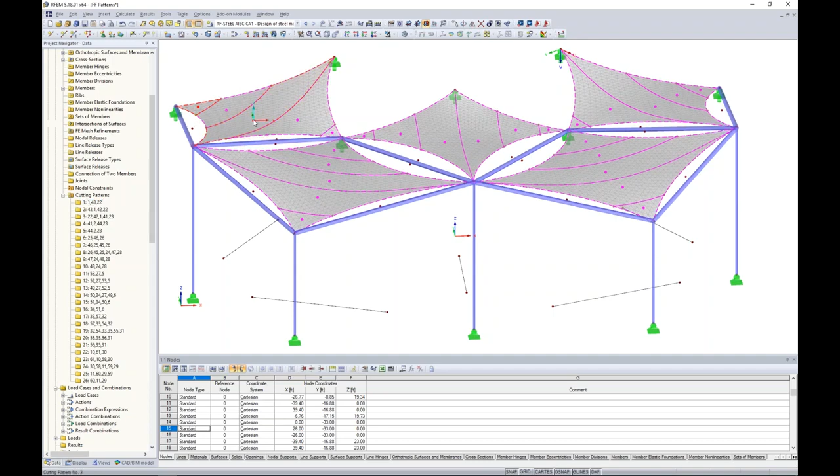So what I'd like to point out is that our cutting patterns are now available to us in our Project Navigator. And you can see, again, they're synced up in the graphical view here as I go ahead and choose the different ones in my Project Navigator. We can double click on any one of these cutting patterns.

And this is where I want to point out that we can go ahead and add in here what's called compensation, which we already covered, in which case we now have a compensation tab that we can add in a percentage in the warp and weft directions. We also can account for those allowances.

So under the Allowances tab, this is that additional fabric. And in our case today, we want to add in some additional fabric for those welding seam lines of 0.16 feet. The border lines, let's say we want to add in 0.33 feet. So that's going to be applied to this particular cutting pattern. Now, if you don't want to apply it uniformly to all of the line elements for that pattern, you can choose the option here to define different lengths as well for each border line.

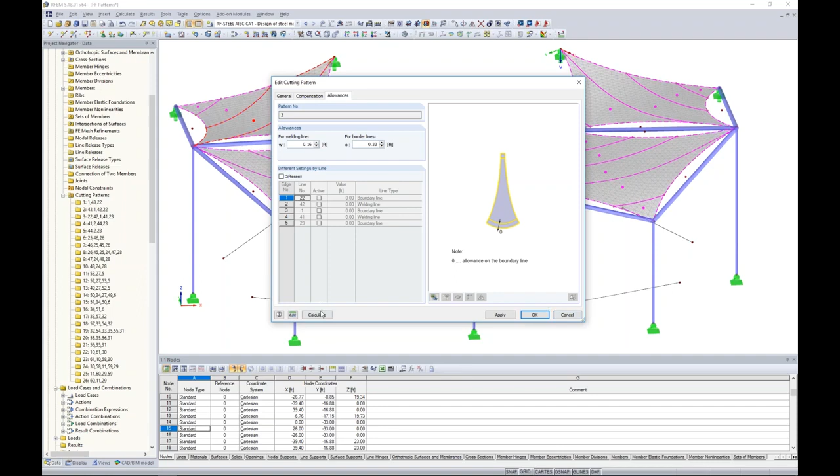So once I've done that, and by the way, you can select multiple cutting patterns here and apply the same allowances to multiple patterns at once rather than individually selecting them. So I would click calculate, and this takes, once again, just a minute to run. So we'll jump to an already saved model. And here we are once we generate those cutting patterns with our results available to us.

So we can use our drop-down box to choose RF cutting pattern here. And what you'll first notice is that for each cutting pattern, what would initially be presented to us here is our table format. So you can see that as I begin to scroll down through this table, this gives me the X and Y coordinate points along the entire boundary lines of this particular cutting pattern 3. We can display here our allowances that we've added in, as well as the FE mesh here. So this is the information you could export directly to Microsoft Excel if you'd like. It's also available to us in our main RFEM tables.

The statistics is pretty important to point out. The area of our 3D shape was 151.17 square feet. If we take a look at the area for the 2D shape, after that flattening process has been applied, we have 151.19 square feet. That's almost identical. We're off by 0.02 square feet. So again, this just goes to show you that something like the minimum energy method has a very accurate process of flattening these 3D shapes into 2D surfaces, which we can give to our manufacturer.

The other thing I want to point out is that we have results available to us during the flattening process just like we would with anything else. So we choose that option here in our drop-down box, and in particular, if we take a look at our strains, this might be important for determining what our compensation percentages should be. So we can view those strains here for our surfaces graphically within RFEM along with our strain values here. Again, everything is available to us in our tables.

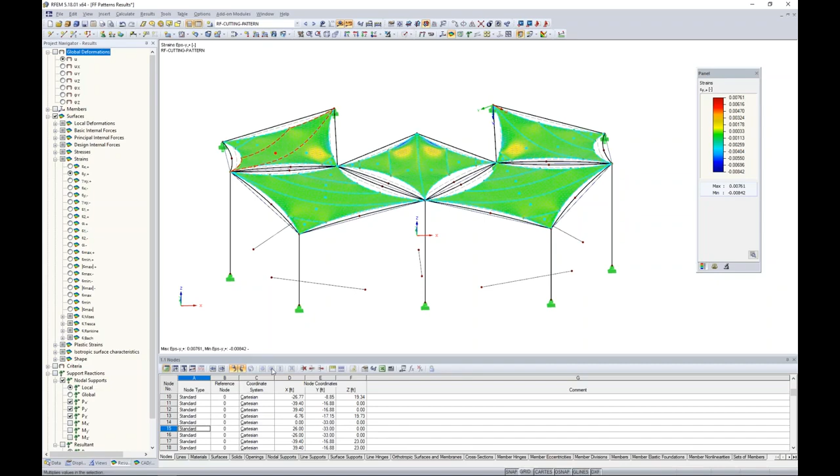So I want to lastly show you guys how to export these files to AutoCAD as well as Revit. So we'll start here with AutoCAD. I can go to File, Export, and I have a cutting pattern tab available to me here. This is where I just tell the program how many patterns I'd like to put in one row, the distance between the patterns, and I click OK. This is going to create a DXF file on your computer. What we can do with that DXF file is open it in AutoCAD.

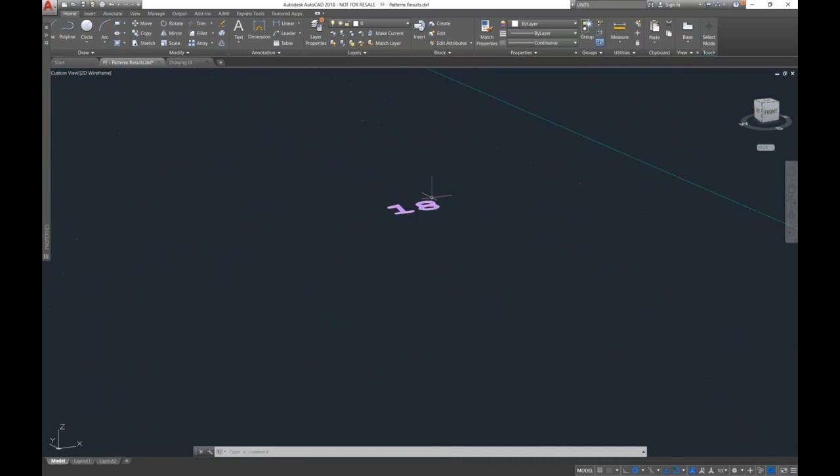And what we will be presented with once we open up that DXF file is, first of all, if I can orient this correctly here, you will be presented with our 3D view of our membrane structure. So these are our fabric membranes. If I zoom in here very, very closely, I see a small number here. This number represents the cutting pattern. Now, of course, we can increase these numbers if we'd like to do so within AutoCAD.

Well, if I scroll over to the 2D flattened patterns and I scroll all the way in, we should see a number available here. So that's nice that we can correspond these 2D flat elements to our 3D surfaces here. Now we can take this and do whatever we'd like with it in terms of printing it out for our manufacturer. So jumping back then to the RFEM model, what else we can do is to take a look here at one of our load cases. And we'll view only the first load combination here with a 1.6 live load applied. With this, I'm currently viewing the deflected shape, and we'll decrease the deformation factors, and we take a look at our structure here. What we can do with this information is export directly to AutoCAD.

So the first thing I want to do is to make sure here that I have a new file open within AutoCAD, which I do. When I use this direct export to AutoCAD, the program first searches for an AutoCAD license. I want to check this option for the deformed shape. I want to set the units to inches. That's what I currently have set in my AutoCAD, and I click OK.

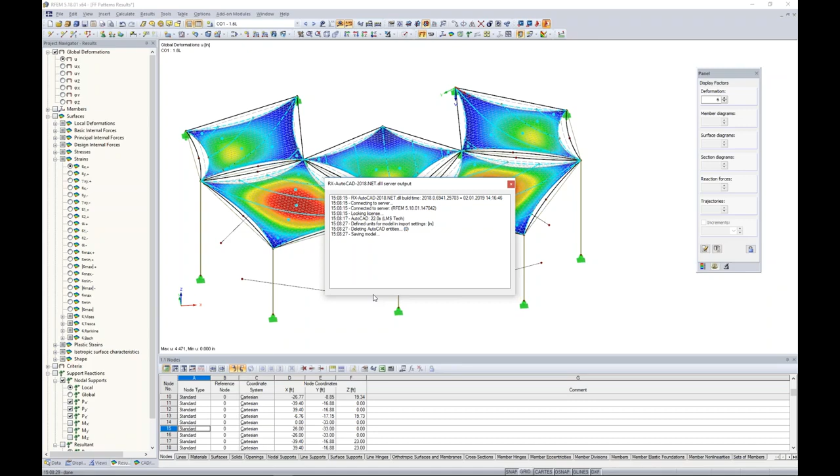Now this is different than creating a DXF file, but rather the program is going to automatically shoot that model into, which if we can open it up here... There we go. Sorry about that. Okay, so we can open it up here in that blank model, and you can see that the structure is automatically shown to us directly within AutoCAD. So that's just the difference here of a direct export versus creating a DXF file.

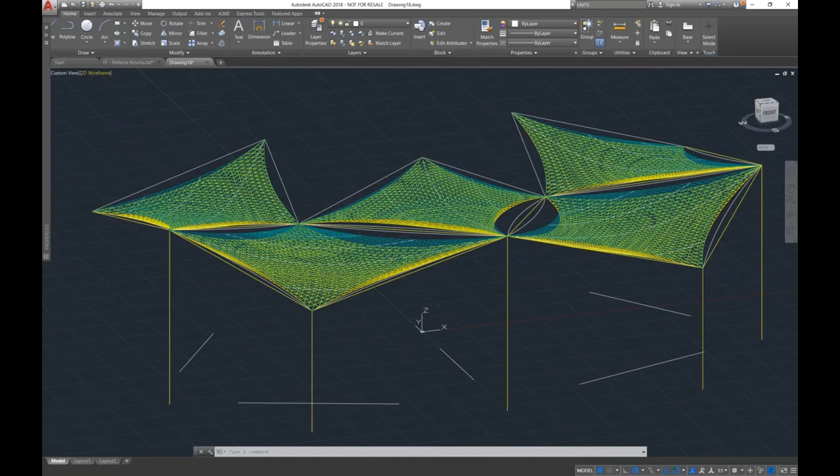This is my deflected shape of my membrane surfaces under that live load. So maybe we can change this to a shaded view here instead. Then under our layers, maybe we want to deactivate the initial form finding mesh shape that was found by the program, not under the live load, and then we can scroll all the way down to the bottom. Maybe we deactivate here the additional line elements. So now we're presented with a nice format for the deflected shape under that live load only of our structure.

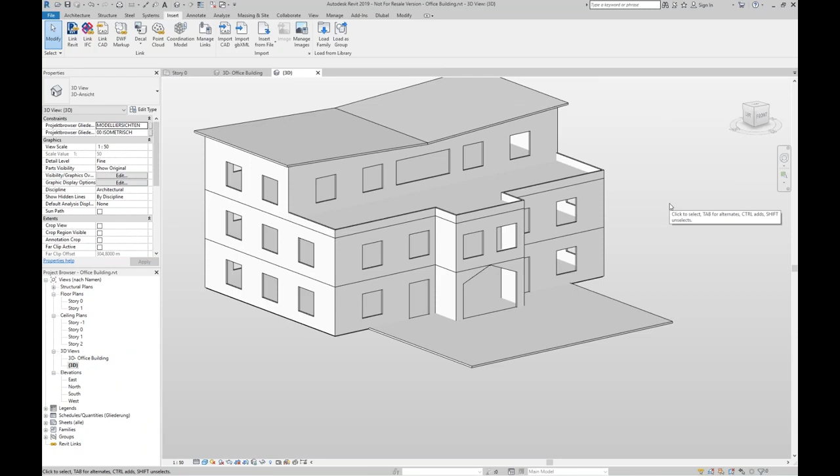So what I can do with this now is go to File, Save As, and I want to save this as a DXF file. So I create my DXF file and I call this one Form Finding REVIT with the DXF file extension. Save that to my computer. Now I'm going to jump to REVIT, and you can see here is my office building available to me directly within REVIT. If I'm interested in importing this canopy structure into REVIT, I can do so with this option here called Link CAD.

So the program tells me I have to save my model, no problem, we'll get through that. And then we can select here our form finding REVIT file that we just created as a DXF. Now it's important to set here the origin to origin positioning. I click OK, and here is our canopy structure. Now what I do need to do is to select this object here, and we will move it to story 0, and it will shift it up. And now we can see that canopy structure available to us directly within REVIT to add to our drawings and so on. So quite powerful in terms of integrating with the different BIM options as well.